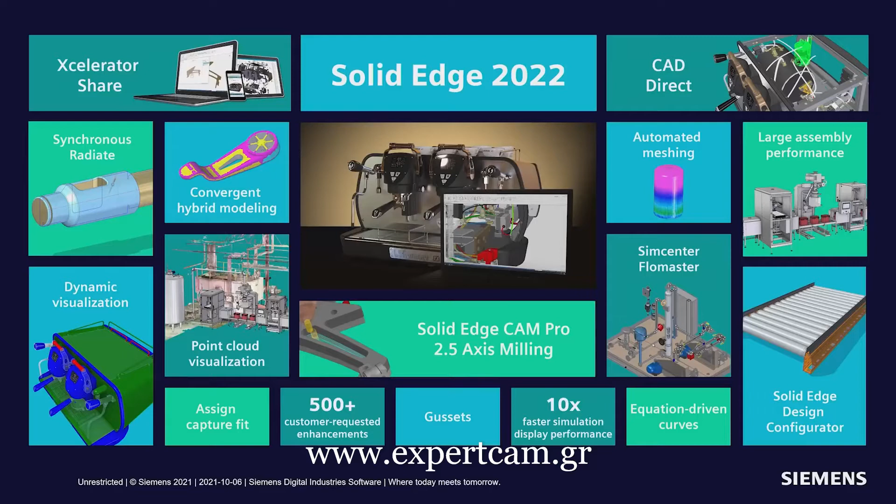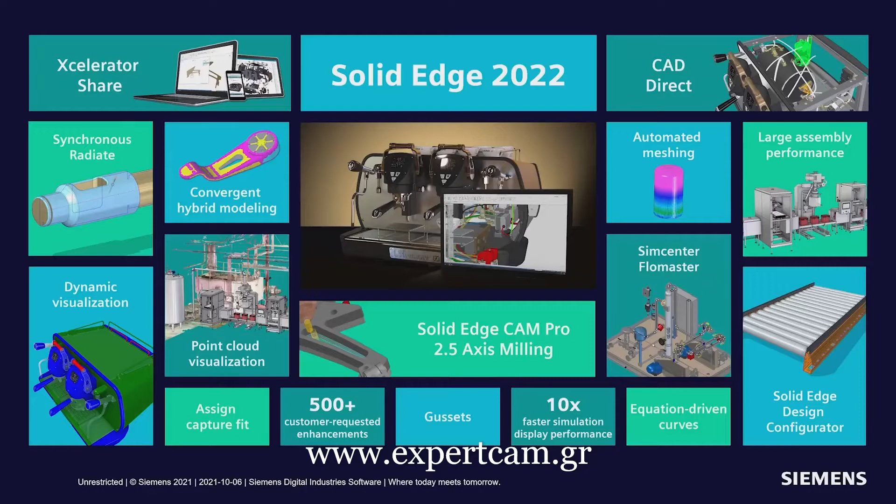So let's talk about Solid Edge 2022 itself. Solid Edge 2022. Engineered to grow your business. There's so much in it, we'll only be able to cover some of it today. Things like Xcelerator Share, allowing you to collaborate with customers and suppliers. Or CAD Direct, integrating CAD files from other systems directly into Solid Edge seamlessly. Point cloud visualization, big scans of plants, being able to design your equipment in context of that big scan. Solid Edge Design Configurator, a whole new capability to configure your designs quickly and easily for your customers.

Now, as we go through our discussion today, we're going to be using two different data sets because there's just so much to see, such a broad range of functionality with Solid Edge. We'll be working with an espresso maker from Fiamma, a company based in Portugal. And we'll also work with a product from Bergner, a company based in Switzerland that makes chemical and pharmaceutical custom machinery.

So let's start by talking about mechanical design. And let's start with CAD Direct. CAD Direct lets you seamlessly integrate data from other systems into Solid Edge without translation and automatically take updates. We'll also talk about convergent modeling. We've been working on this technology for several years now. It's getting very sophisticated. The ability to integrate mesh models with B-rep or solid models in one seamless way. So let's look at that with Jeff now.

Thanks, Dan. First, we'll take a look at subdivision modeling. In this example, we will add support members to the base of the Fiamma espresso machine. The new subdivision bridge command can be used to easily connect edges or faces of subdivision cages and create a lofted structure between them. Here you see an example of that, where we'll select the faces of each subdivision model that we want to loft between.

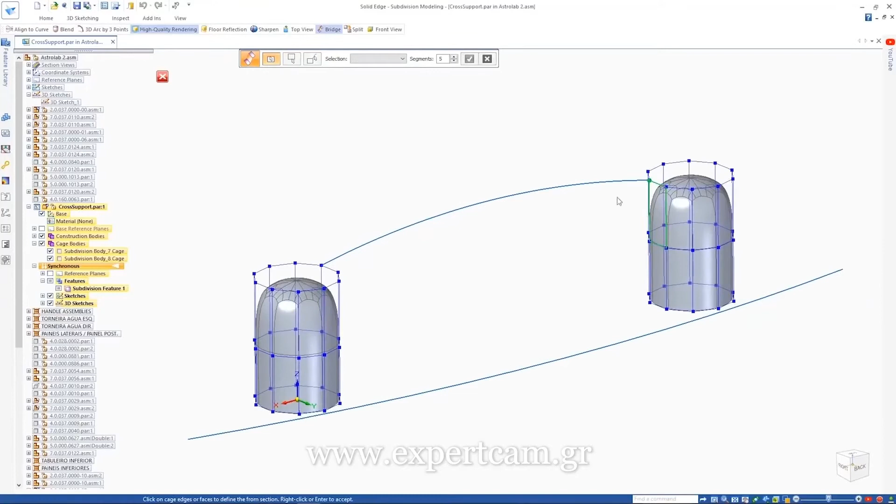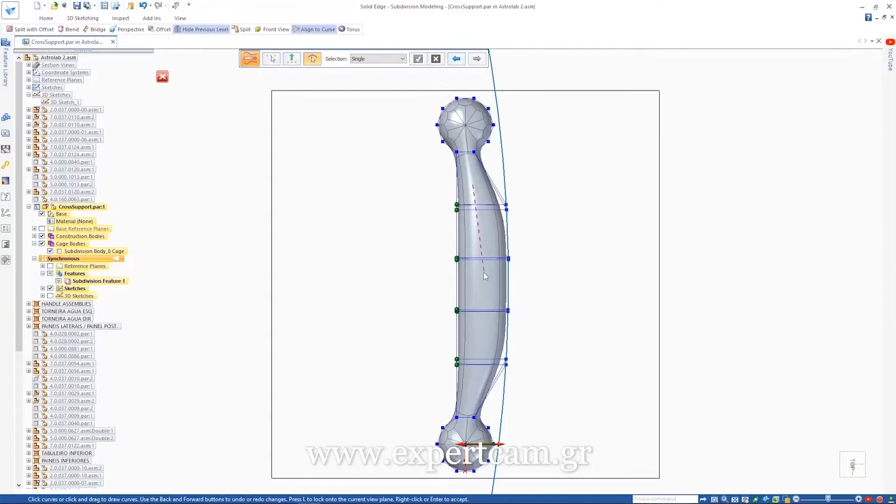Then we'll add the control curve to help us further define the overall shape. Next, we'll be using the new Align to Curve command to further define the shape of the part. Simply by selecting the cage vertices to define the direction and then picking the curve, those vertices automatically map to the curve. You can even sketch your own shapes and curves inside the context of the command. Even gesturing is supported for inking of your curves.

Here we'll show another option called Split with Offset to add some pockets to support the rubber feet of the support. A simple selection of the edges with an offset allows you to pull to create the pockets for those rubber feet. Next, we're going to replace the handle with a new design that's been 3D scanned.

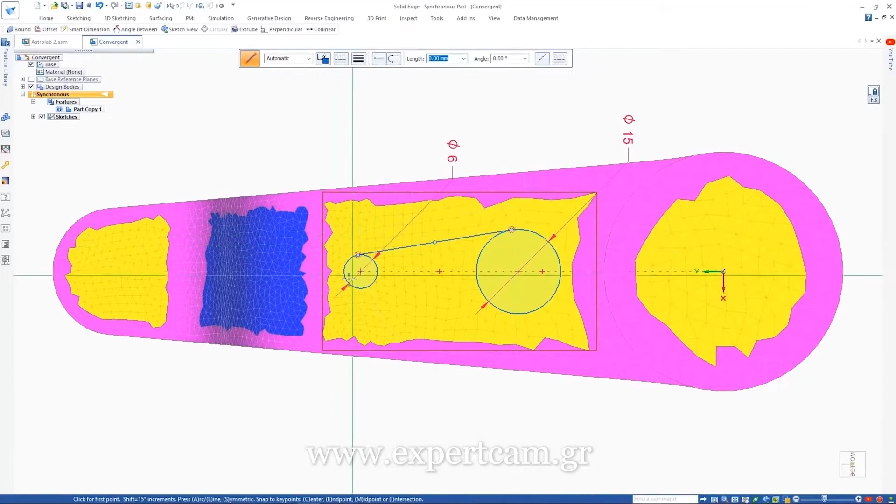This result is a mesh model that we import. We can visualize the mesh with the new Show Facet Edges command. In this case, we'll clean up this model a little with the Remesh command. Now, faces have automatically been identified and the sketches are added to the planar faces of the mesh. We add a series of cutouts in order to reduce the weight and improve the appearance of the part.

Notice the resulting geometry isn't faceted. Solid Edge now seamlessly combines mesh and B-rep geometry in the same body or part. We'll add additional cutouts to reduce the material. Once the cutout is complete, it can be patterned.

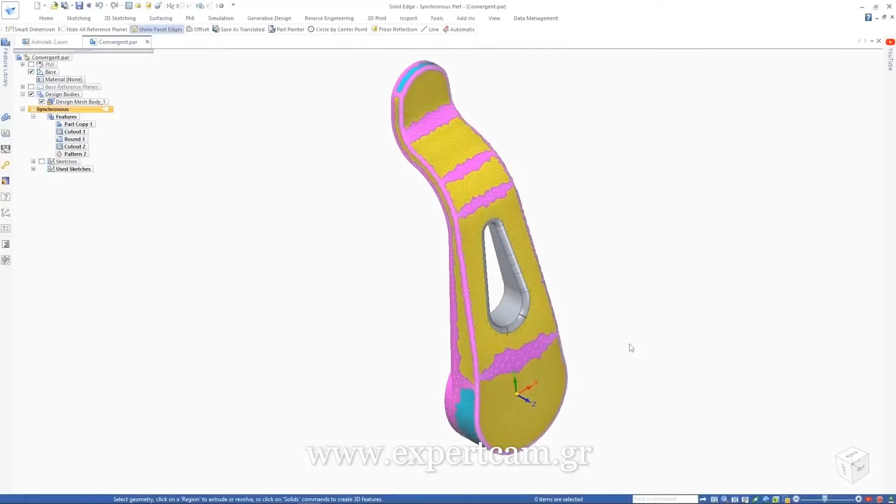Finally, we're back in the assembly where we'll replace the current handle with the new meshed handle. But you'll notice the mounting holes are missing from the component. This can easily be solved by doing a Boolean operation using the mesh model as the target and the components from the assembly as the cutting geometry. These new capabilities further enhance your ability to use mesh models in your design process.

Now we'll use the new component finder in the Solid Edge Pathfinder, and we'll search for the desired filter holder handle, which is designed as a family of assemblies. One of the versions is designed for a double espresso shot, the other is a single espresso shot. Opening the drawing of this assembly, we'll use the new family of assemblies parts list to place a table and detail the parts used for each member.

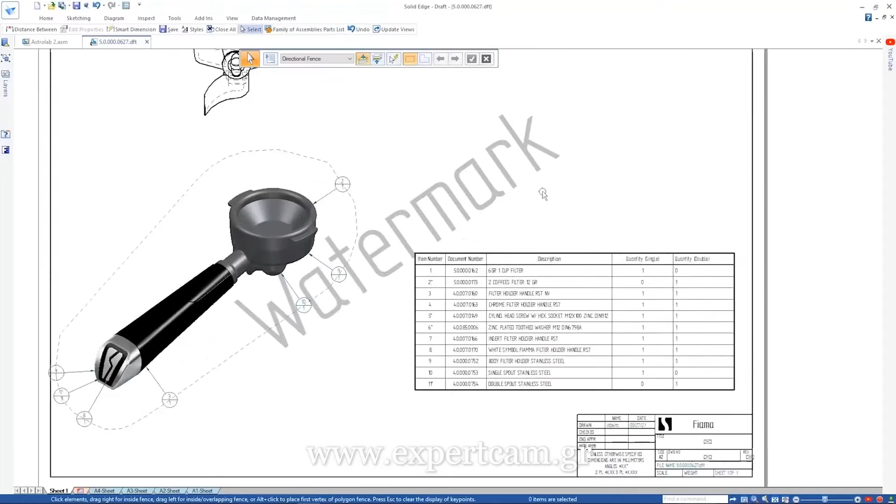Now we'll look at some enhancements to dimensioning in Draft. Dimensioning to virtual intersections or arcs of rounded edges is now supported. We can also choose to display projection lines to those intersection points. Watermarks are also used to convey important information on the drawing. We'll change the existing one so that it retrieves the document status for the drawing property text.

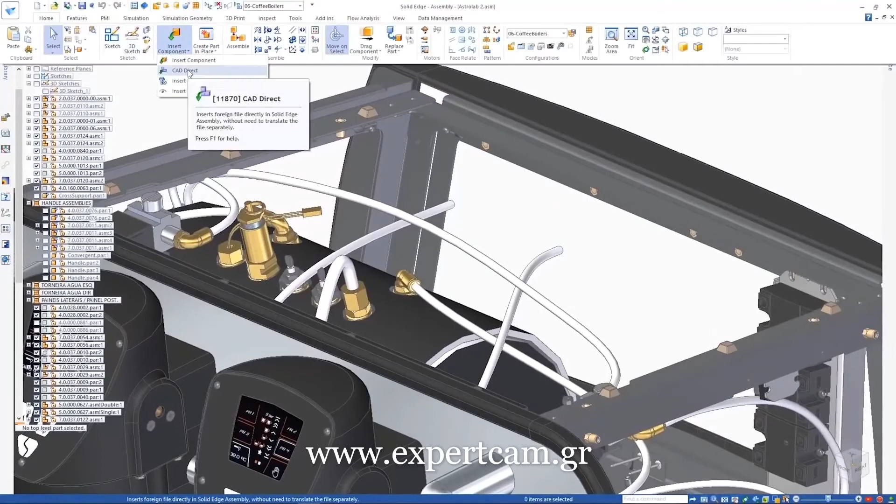The new CAD Direct command enables us to use foreign CAD data, geometry, and assemblies in Solid Edge directly without requiring any translation. The water boilers that you're looking at here were designed in NX. Once inserted into Solid Edge, they can be positioned just like any other assembly. Since we need two of these, we'll simply copy one to create the second.

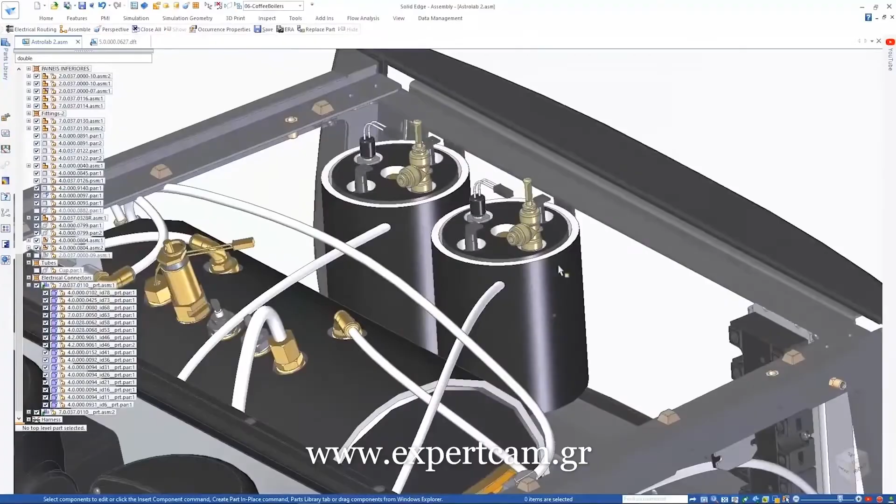Notice the boilers aren't quite in the right location. We'll go back into NX and make the changes needed to the mounting bracket such that they'll be in the right position. Since Solid Edge has associative links with NX, a simple update brings the changes in.

Next, we'll look at electrical routing enhancements. Solid Edge now supports the display of bicolored wires, allowing us to change the display of this ground wire to be striped green and yellow. Various pattern types are supported as well, including single stripes, helical stripes, zebra stripes, and dashes.

And finally, KeyShot, the best-in-class rendering solution, also sees some impressive updates. Decals defined in Solid Edge may be automatically transferred, saving time and effort, which can be seen here on the logos and the cups in the digital scene.

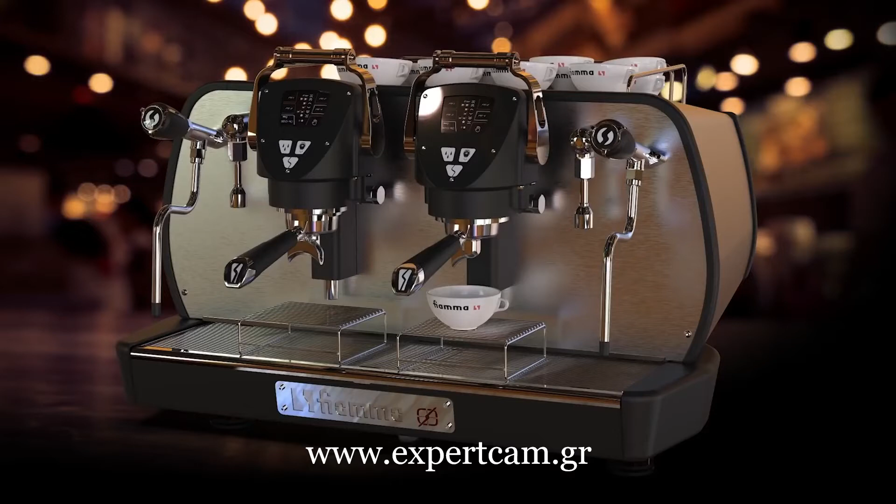Back to you, Dan. Thanks, Jeff.

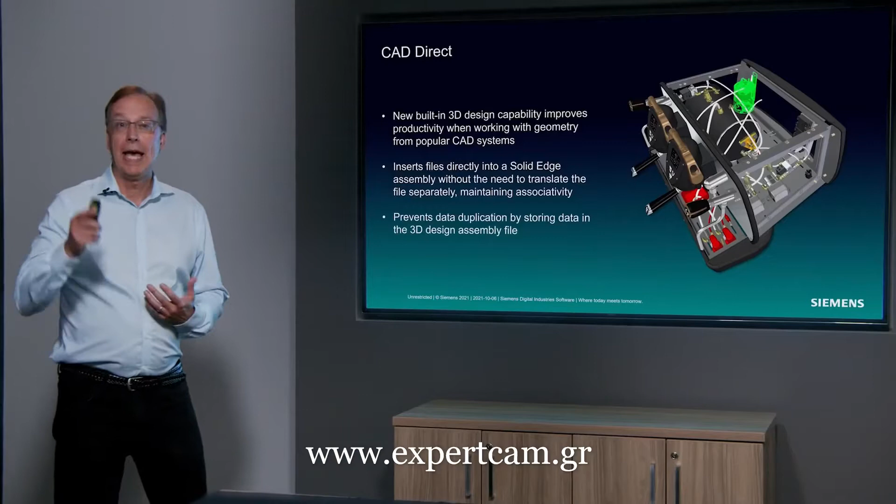Lots of amazing stuff in there, but I'm only going to highlight a couple things here that I think are real game changers. CAD Direct. So you have the capability you've seen to get an NX assembly into Solid Edge directly, no translation. And when you make edits to that NX assembly, it comes into Solid Edge automatically. There's no extra files to manage. You don't have to worry about that. It's all CAD Direct.

And what about convergent hybrid modeling? You saw taking triangle meshes and B-rep solid models, pulling that all together into a single cohesive model, significantly reducing your design time.

Let's talk about some other mechanical design enhancements, some other great things in here. Point clouds. It's becoming fairly common to be able to scan an entire plant or factory and bring that data forward. We can now bring that data into Solid Edge so that you can design in the context of that factory or plant.

What about large assembly modeling? We see people first building parts, then assemblies, then whole factory lines. Assembly modeling in Solid Edge keeps getting faster and faster and faster, best in the business. And Synchronous Radiate, an amazing new command within the synchronous modeling environment that allows you to deal with radially symmetric parts and edit those effortlessly. So let's take a look at that now, Jeff.

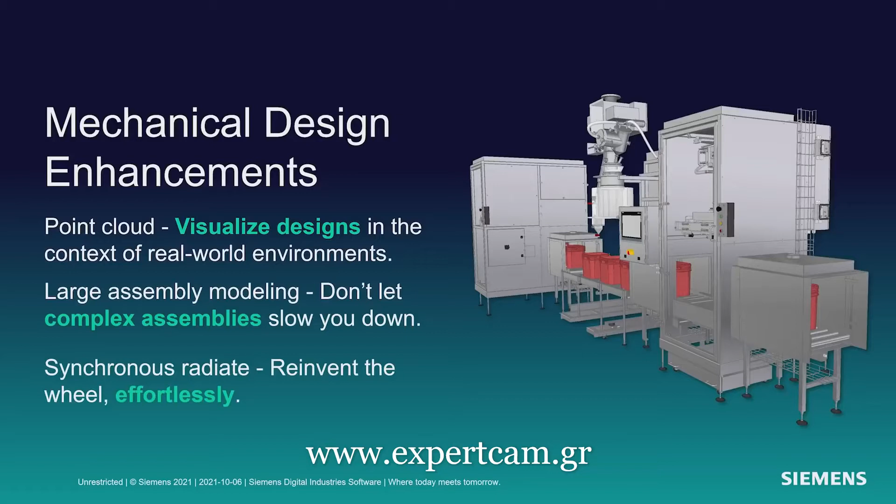Thanks, Dan. Well, the first thing we'll do is we'll take a look at a new assembly preview mode. This mode allows you to very quickly open Solid Edge components and very large Solid Edge assemblies lightning fast. In preview mode, you can manipulate the view, show and hide components, and apply display configurations. In this case, we'll isolate the most critical part of the model that we want to edit using a configuration. Then we'll simply tell the system how we want to open, and open only the components that are to be edited, saving you time and memory.

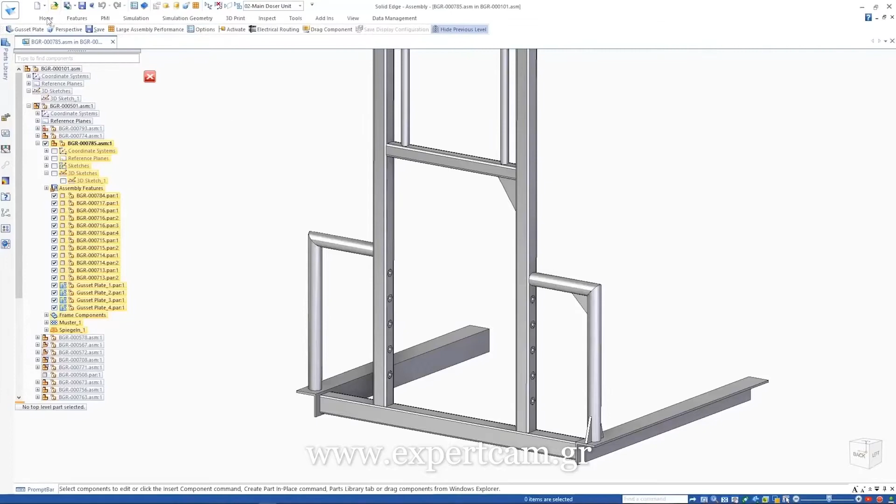Another time-saving enhancement is the gusset command. We now allow you to automatically add gussets to a frame structure. Here you can see the user interface. You can define these gussets in any shape and size that you desire. Then you simply select the frame element, position where the gusset is to go, and the system automatically creates the component there.

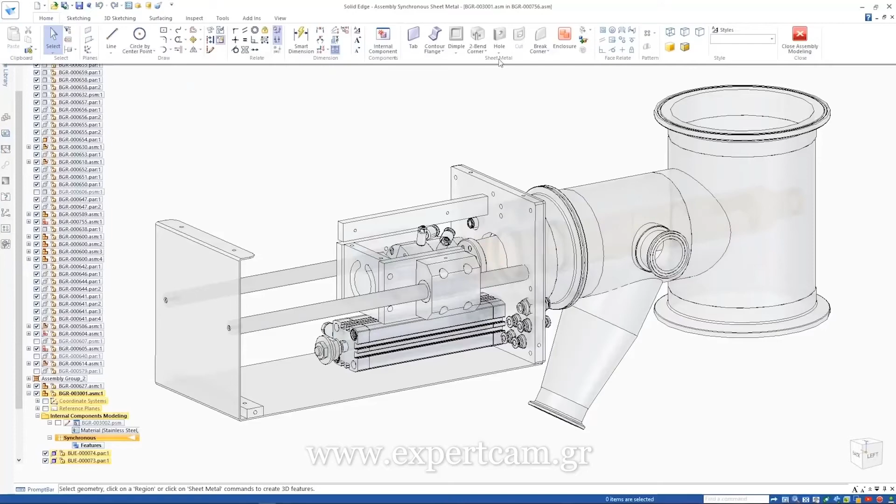If we continue down the internal components theme that we introduced in the last release, we now allow you to create an internal component and actually create the model geometry directly inside the Solid Edge assembly. We've introduced this new assembly modeling capability that gives you the ability to create the entirety of a design without any need for an external file. Here we have a pneumatic cylinder, which will be imported as an internal component. We need to add a bracket to this assembly, but since it's a purchased part, we'll just create this as an internal component. And again, saving the need for external tracking of files.

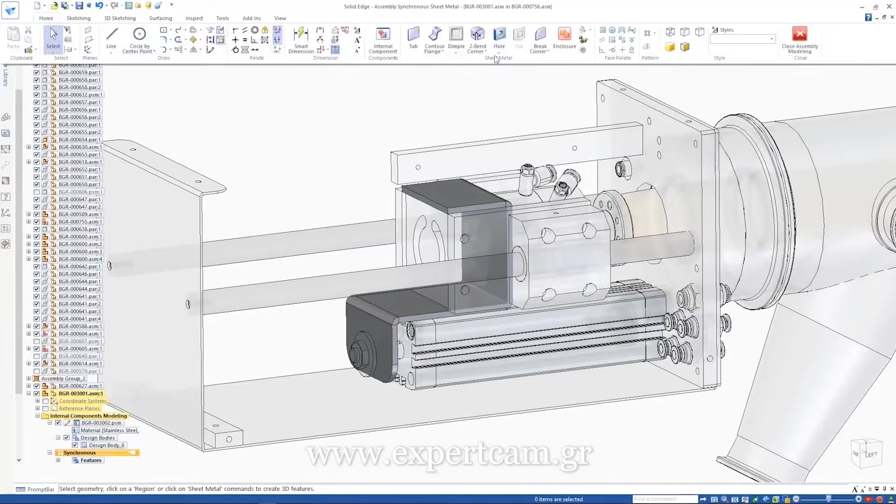If you'll notice during sketching, a pop-up menu allows you to quickly access commands that are relevant to your selection. And this is new for Solid Edge 2022. So we've defined our sheet metal part. We'll also have to give it a material definition and a gauge definition. In addition, we're able to create geometry and reference the components from the assembly, whether they're internal components or they're real components in the assembly. So again, we're defining the material gauge for the sheet metal component, and we've defined this component completely inside the context of this assembly. You're also able to drag the component, doing animations using both internal components as well as the real component combined.

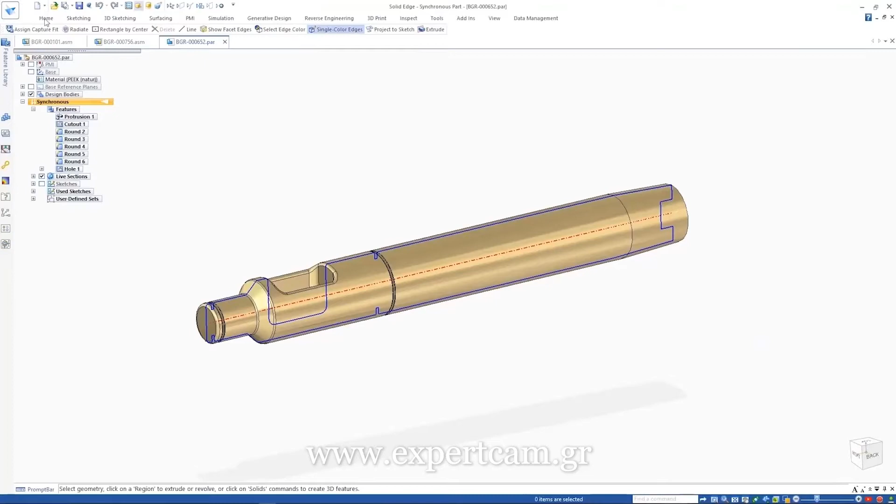The new component finder speeds up the process for locating parts within the assembly. You simply key in the name and it finds the list quickly. Here we found a shaft, and we used the new radiate command to edit the radius or the diameter of the shaft component. You simply select the shaft, putting the components in the select set that you wish to change, and then Synchronous does the rest. In this particular example, we want to include the pocket in the radiate and the offset option. Simply selecting that pocket and including it allows that to be done.

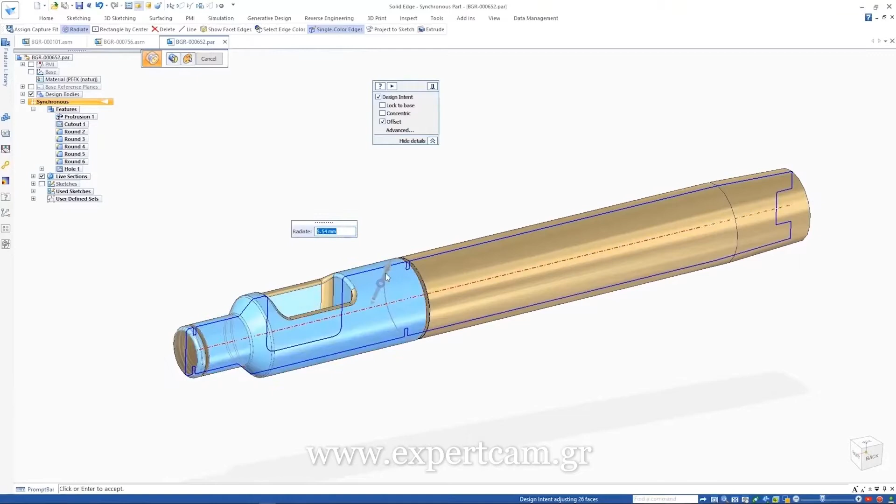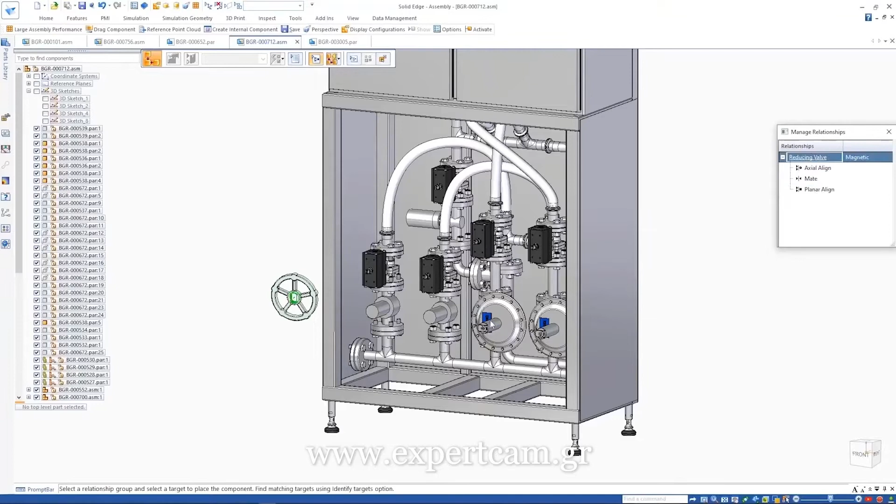A new Assign Capture Fit command allows relationships to be predefined on a component while in the context of the part. Here you can see that Capture Fit relationships already exist. We'll add a new Capture Fit to the collection and save it to the component. When I place the handle into the assembly, all you have to do is select the component and select the mating components that you want to mate it to, and the handle automatically snaps into place. It's as easy as that. Here's another example where we have a handle that needs to snap to 5 new locations. Again, the Assign Capture Fit makes it easy.

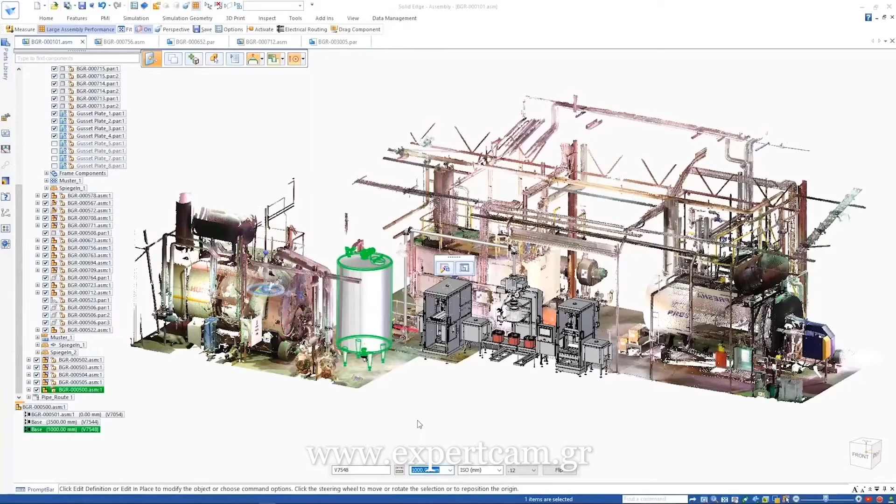Solid Edge now has the ability to place point clouds within the context of your design. This allows you to reference and visually indicate where your components will be placed inside a large assembly. Solid Edge supports multiple point types and then allows you to position your component inside the context of the plant design. The point cloud can be easily repositioned. Clipping planes can be used. You can even measure to the location of the point clouds relative to your design. Here you see that the tank component was in the wrong position and it was moved to match the point cloud and the plant definition more precisely.

And that's it, Dan. Back over to you.

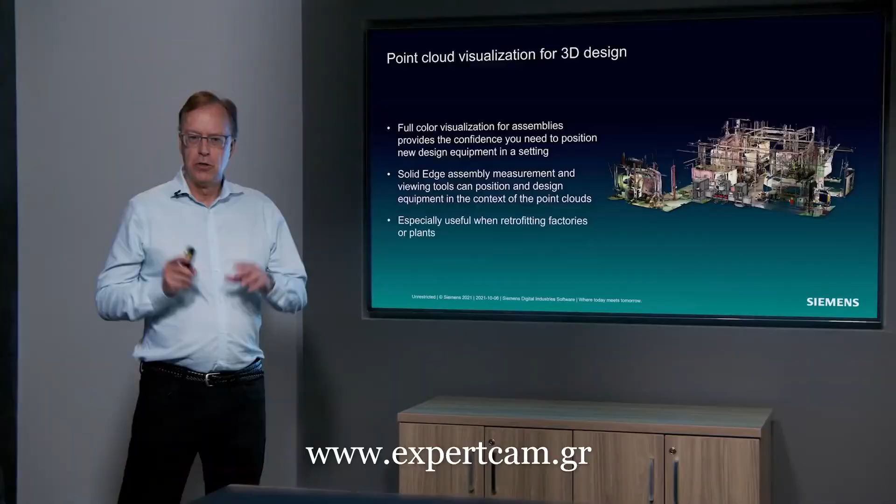All right, thanks, Jeff. So many great things to see in there. But again, something I really want to highlight to you is a game changer: point cloud visualization. The ability to take scans in, gigantic scans, millions or billions of points, and be able to look at those in the context of Solid Edge and be able to integrate your design directly in there and design in context of that point cloud. As you can see, they're full color, they give the full feel of the plant or factory. Really amazing stuff.

And we see that our customers really love this new technology. So Benjamin at Bergner, for example, eliminated a lot of tedious manual effort. It's just so much easier with the new point cloud technology.

And what about large assembly modeling itself? Order of magnitude increase in large assembly modeling performance. So you have that preview mode where you can very quickly bring up the assembly, very, very massive assemblies, decide what you want to work on, and then just bring in that bit of the assembly. Really improve your productivity.

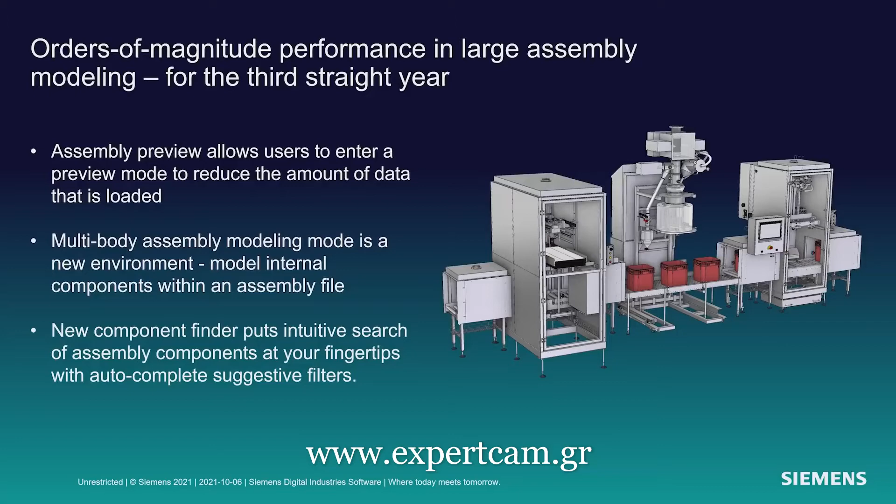And we see that folks are already taking advantage of this. Our beta customers have been using this, like Luca Carminati at CMS. Much, much faster work, save a lot of work on their designs. And what about synchronous radiate? Really amazing stuff if you're working on those axisymmetric parts. Being able to make edits without having to do any extra effort happens almost magically. Great stuff.

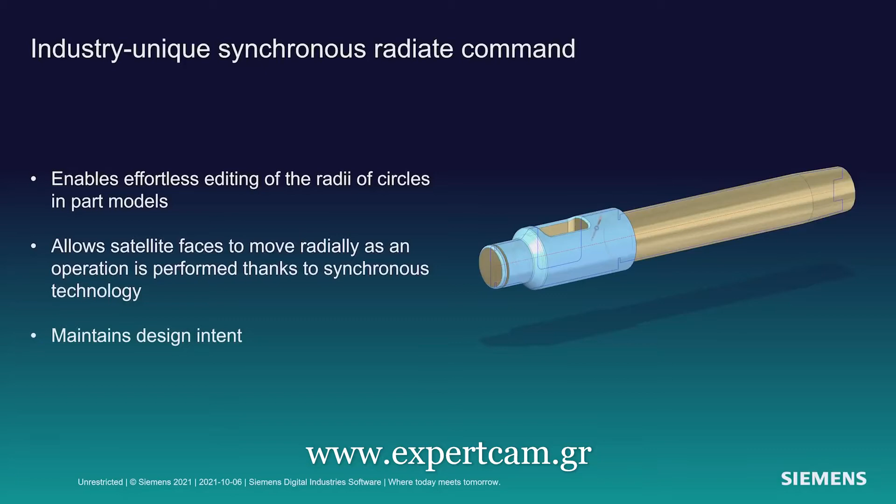Okay, next up is Solid Edge Design Configurator. I'm very excited about this. If you're doing any engineer to order, configure to order type of products, the ability to very quickly change your designs and have new quotes very quickly. Let's take a look at it with Jeff.

Thanks, Dan. The new Solid Edge Design Configurator allows you to design multiple product variants directly in the context of Solid Edge. In this example, we'll configure a variety of conveyor designs. The first step is to select the component to be configured. The next step is to define the master input parameters of the configuration. In this case, it's the length and width of the conveyor plus the pitch of the rollers. Values can be easily edited for any parameter, and the images can be included in order to help the end user identify the needed inputs when configuring the model.

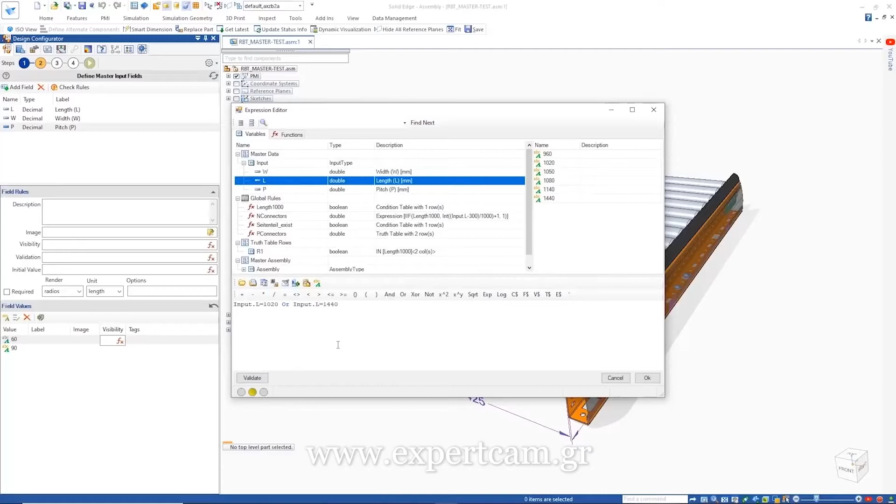Defining a new input parameter for the pitch of the conveyor, we will quickly configure the name, type, label, and render style to use radio buttons. The pitch value of the conveyor can be customized between 60 and 90. However, since different lengths of the conveyor require different pitches, visibility rules need to be applied. This is done by making use of a simple expression to define the intelligence. Here, the rules are being validated to ensure the consistency and proper definition have been made.

Here, the function is going to be copied and pasted to allow you to easily reuse formulas without having to include them again. Skipping to the last step of the configuration, we can see the configuration form is properly created. Next, defining the rules for the process. Here we have multiple rules to drive and configure the connectors at the bottom of the conveyor. We will use a combination of simple condition and expression rules and a truth table to work out the number and positions of the connectors. All rules can be quickly validated.

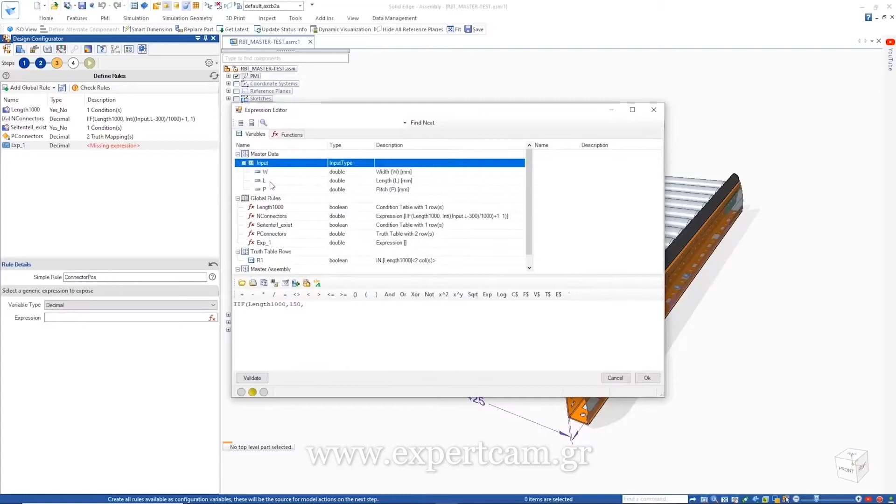Finally, we specify the actions to be taken. Here, variables are set and components are replaced to satisfy the input parameters. A rename model action will ensure our final assembly will be renamed appropriately and also create the other necessary outputs, for example, a STEP file as shown here. Now we can run it quickly and create as many configurations as needed. A newly generated configuration can easily be shared with Pack and Go. The configuration logic is all stored within the CAD model. There's no need for any further plugins or external resources.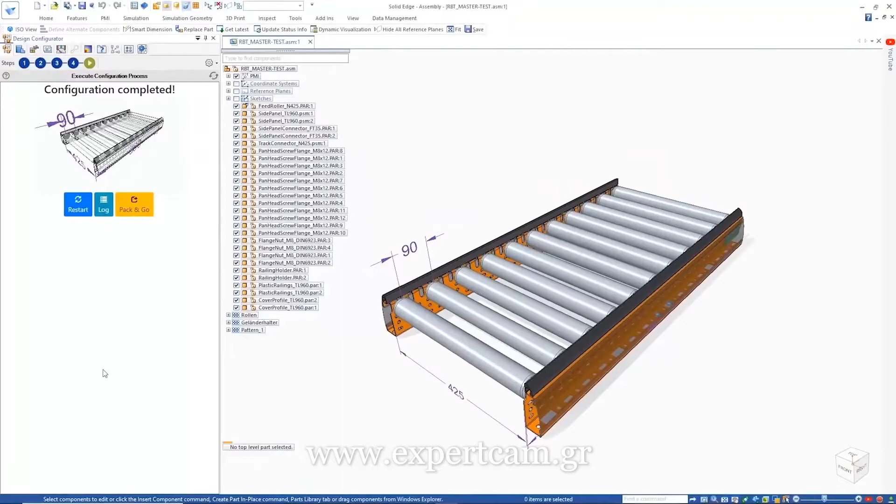And with that, Dan, I'll hand it back to you. All right, thanks, Jeff. So as you see, with the Solid Edge Design Configurator, you can accelerate your configure to order and engineer to order processes and create compelling sales proposals. You're also going to see that it really error checks for you and it creates a nice dialogue for your users to interact with so you can very quickly configure new products.

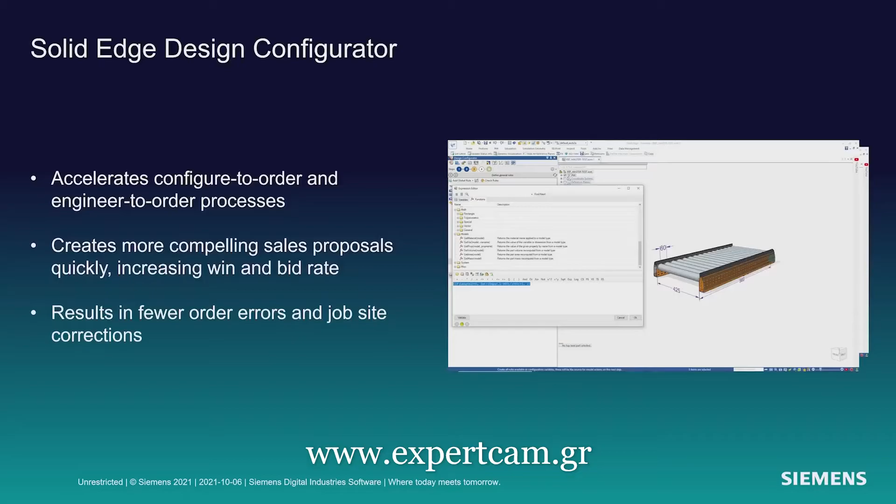What about CAM? Solid Edge CAM Pro. Tried and true technology developed over the last 40 years. A lot of users using it today and enjoy the benefits of it. But what if that technology was available to all of you, all Solid Edge customers on maintenance? That's what we want to introduce to you today with Solid Edge 2022. Jeff. Thanks, Dan.

Here we'll be using Solid Edge CAM Pro to create the manufacturing toolpaths for the rear legs of the Fiamma espresso machine. First, we'll use the Solid Edge assembly tools to create the shape to represent the stock parts, and also the parts that form the fixture assembly, which includes the standoff plate as well as the additional fixing holes from the standard database. We will also make use of supplier catalog in 3D Find It to get the appropriate socket head cap screws to be used to fix the component in the fixture. So as you can see, Solid Edge is a great CAD for CAM tool.

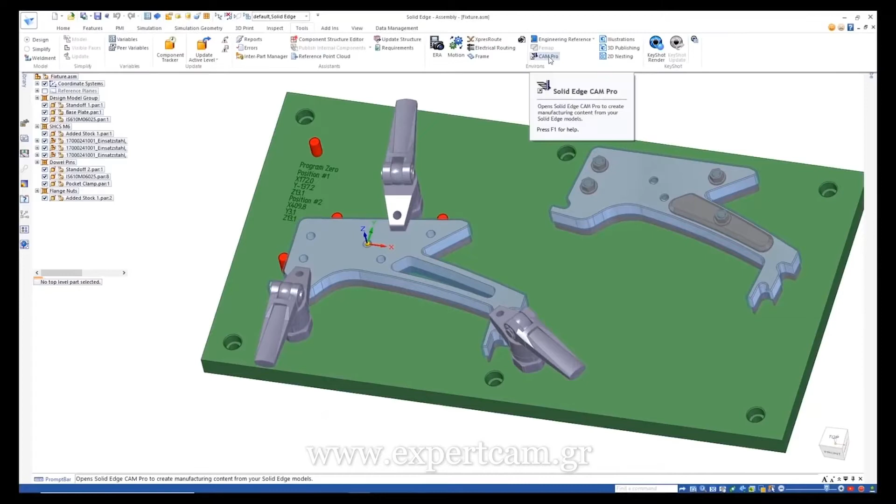We'll need to machine this in two separate steps. Step 1 is to mill the pocket and drill the holes, and step 2 is to machine the profile. One click will send the entire assembly to the Solid Edge CAM Pro application. Note that associativity is maintained at the complete assembly, so if there are any last-minute changes, we can quickly update them and continue the NC programming process.

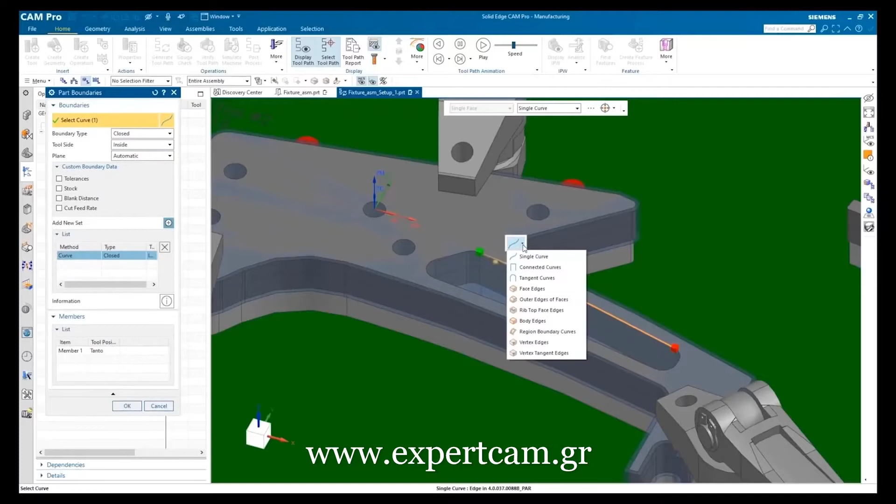New for Solid Edge CAM Pro is the ability to create adaptive roughing toolpaths for 2.5-axis operations. This is included at no additional cost. These are faster than traditional toolpaths and extend the cutting life of your tools. Notice the advanced graphic capabilities for validating your toolpath.

Here we'll create spot drilling operations for the 5 holes in the support. Notice the graphical pop-up hints that help us with operation selection. Graphical helps are also available for geometric selection. Each time we select a hole, we get a preview of the machining that will take place. Again, at any point in the process, we can get visual feedback on our decisions.

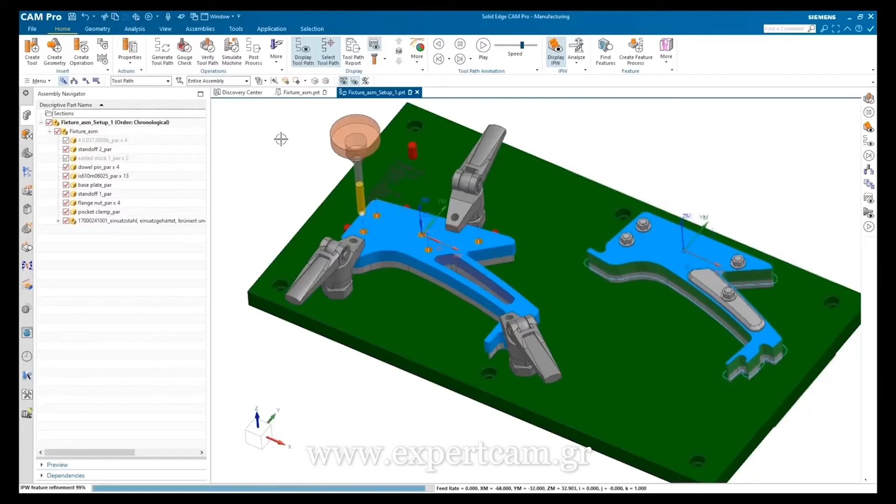Now that our CNC program is complete, let's run through the whole visualization process. Notice you get to completely visualize the entire machining process before committing it to machining. Of course, no job is finished until it has been post-processed for a specific machine.

That's where PostHub comes in. It's an online database of over 1,200 post-processors. You can easily filter and find exactly the one you need. Also, PostHub is constantly updated, bringing you the most recent tools. And Dan, with that, I'll turn it back over to you.

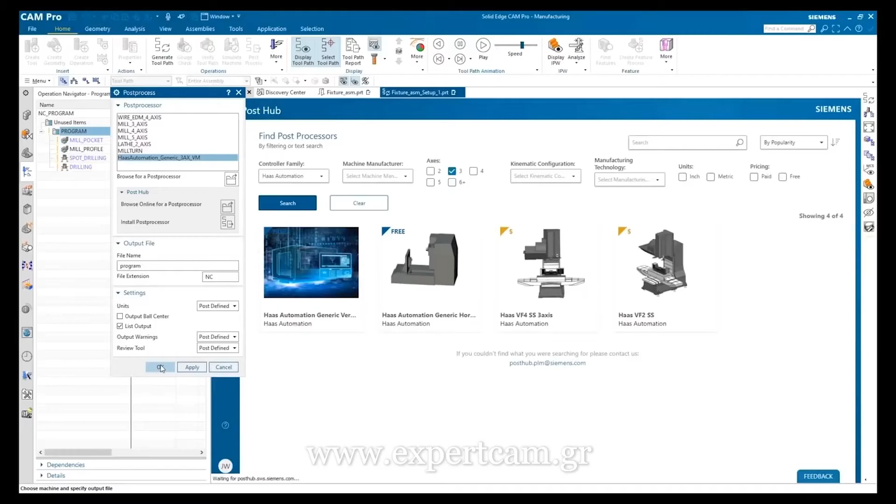All right, thanks, Jeff. I'm really excited about this. There's a great heritage in Solid Edge CAM Pro and our machining technology over the last 40 years. Many people enjoy that technology, but now every Solid Edge user who's on maintenance can enjoy that technology and work with Solid Edge CAM Pro.

Next up is Solid Edge Share. I'm super excited about this. It's a functionality in Solid Edge that allows you to collaborate with colleagues, suppliers, customers very easily. Nothing for you to set up, works on all sorts of devices. So let's take a look at that.

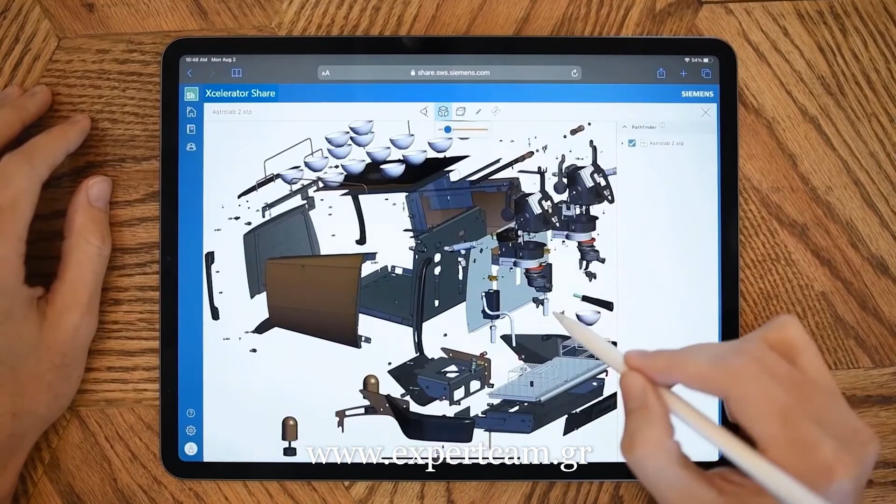Jeff. Thanks, Dan. Solid Edge Share allows you to import your CAD models into a secure cloud location. Within that context, you can view, you can rotate, you can show/hide, you can 3D section, you can even do measurements and markups. Here, a reviewer has identified the need for some change in the design. The location of the change is identified by a sticky note and a place describing the needed change.

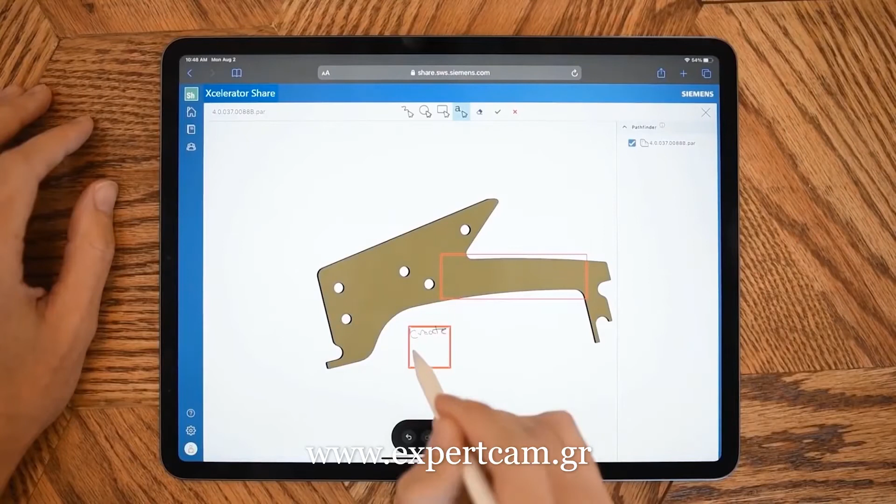Solid Edge Share offers maximum traceability, as all markups are recorded, enabling conversations back and forth on any of the issues you're tracking. It also records who made the markups and when it was made. We can also easily go back to the markups at any time. Simply save your markups and send them to the designer for review.

With Share, you can also directly connect to Solid Edge, synchronizing your data from your desktop to the cloud. Here we have the same project on our desktop. It's represented simply as a folder. Any data that we have in this folder will get synchronized in the background.

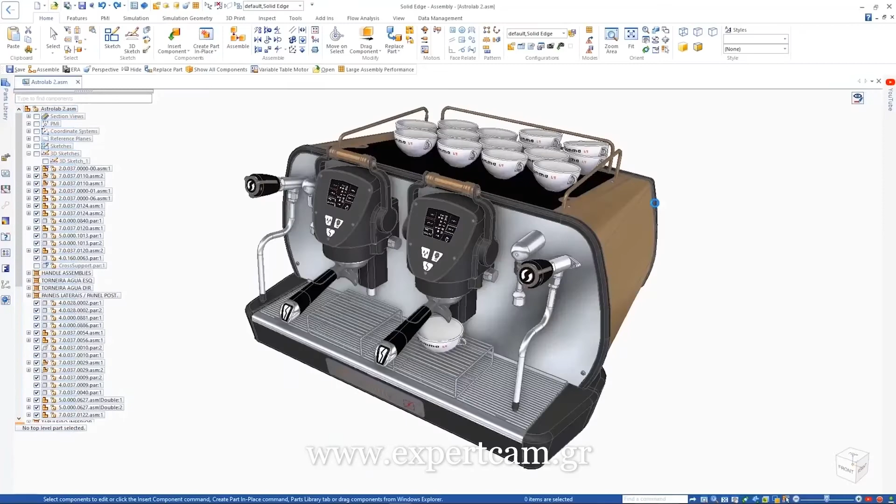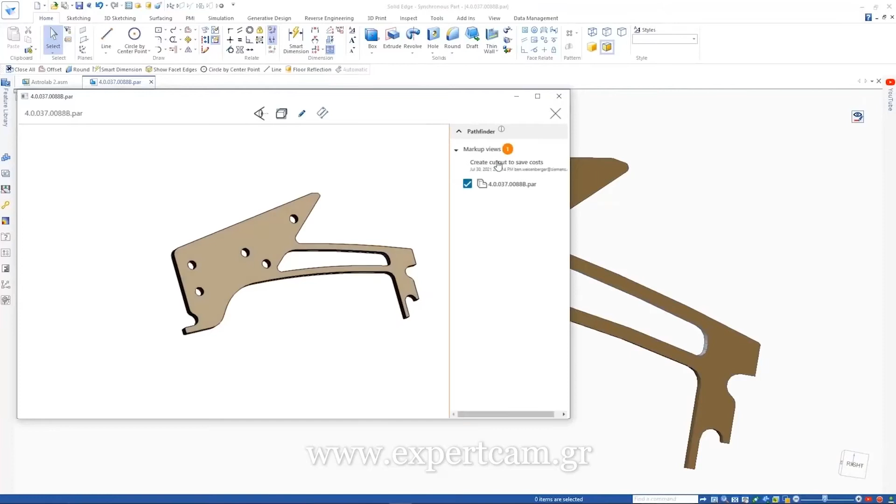In Solid Edge, we can securely sign into Solid Edge Share and see those same cloud-based projects. The espresso machine can be opened and we can go right to work on the part in question. The designer can easily access that same markup in the cloud directly from within Solid Edge. Once completing the change, another markup continues that two-way conversation and collaboration with other stakeholders so that the issues are tracked appropriately.

Another great feature of Solid Edge Share is the ability to share a project with anyone. Simply enter the email address of the person with whom you'd like to share and choose their access permission level. Here we can choose view, or view and download, or edit and download, depending on how you want to protect your intellectual property. We'll share this design with one of your colleagues and our customers and give them the appropriate access.

Finally, with the Share Augmented Reality feature, you can see exactly how your designs will look in the real-world environment. Snap the design onto any surface seen in the camera lens at the correct scale. The finger gestures can be used to manipulate the model and easily visualize what your design looks like in a real environment. So back over to you, Dan.

Thanks, Jeff. All right, Solid Edge Share. Really great stuff. Next generation cloud-based collaboration that allows you to work inside your company with colleagues or work with suppliers, work with customers. Nothing for you to set up. Works on every device. So whether you have a Mac or an iPad or a Chromebook, it works on all those devices with no special setup. And you saw the ability to write notes that are automatically converted to text, share those markups. Very exciting stuff.

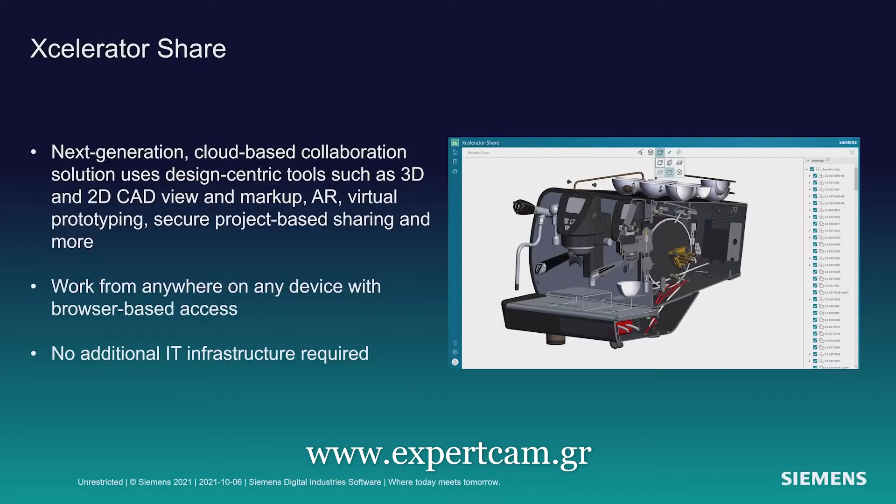Next up is dynamic visualization. You make complicated products, large assemblies. How do you know which parts are from which supplier, or which parts are of what material? Dynamic visualization will help you with that problem. Let's take a look at that now with Jeff.

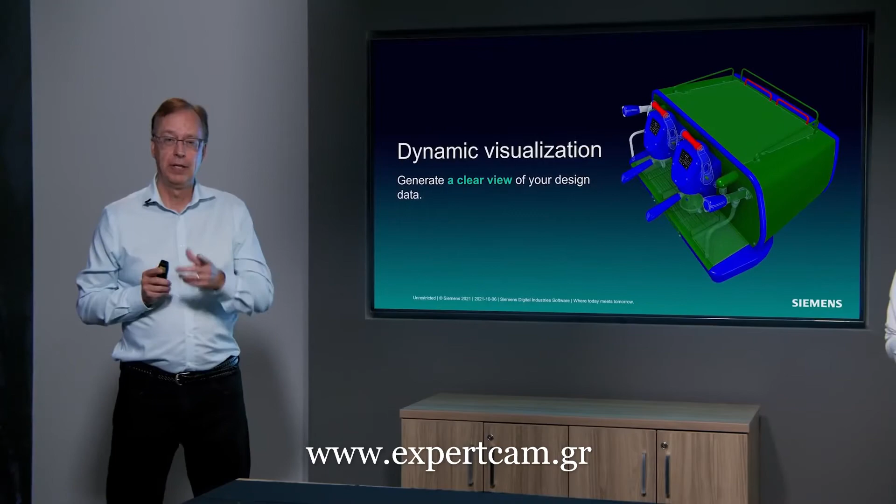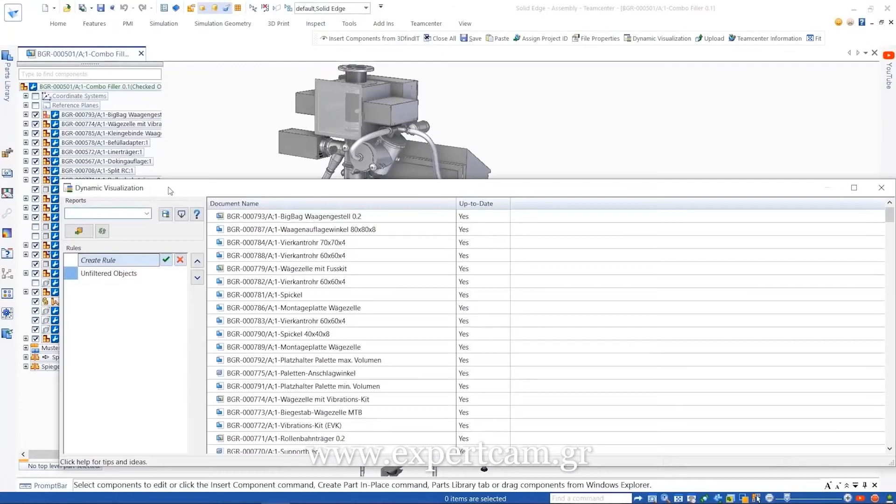Thanks, Dan. Dynamic visualization gives you great capabilities to generate visual reports of your assembly. We'll open a Solid Edge assembly using Teamcenter Active Workspace and create a visual report based on component supplier and material definition. First you add columns to the user interface for the properties you want to filter on. Here we've added suppliers and material, and for each we'll filter on the particular material and supplier we're interested in visualizing.

Once the rule is created, you simply apply it, and the model display changes to show you the rule definition. Here you can see in red the components based on that supplier and material selected. You can also export these rules and import them into various assemblies.

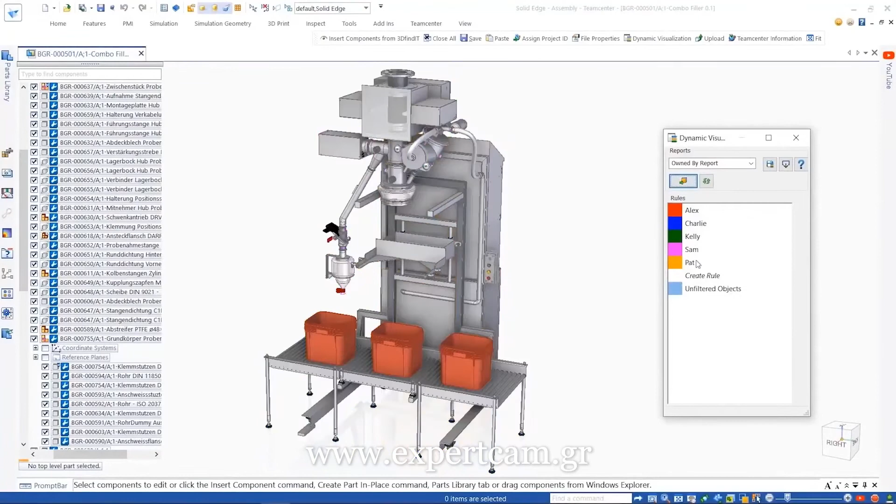Here we have a rule that identifies which user created which components. We'll modify that rule to identify work in progress as well as components created by Pat. We can highlight those, select them, and then go into edit mode, where we'll see we need to add a warning light to this box.

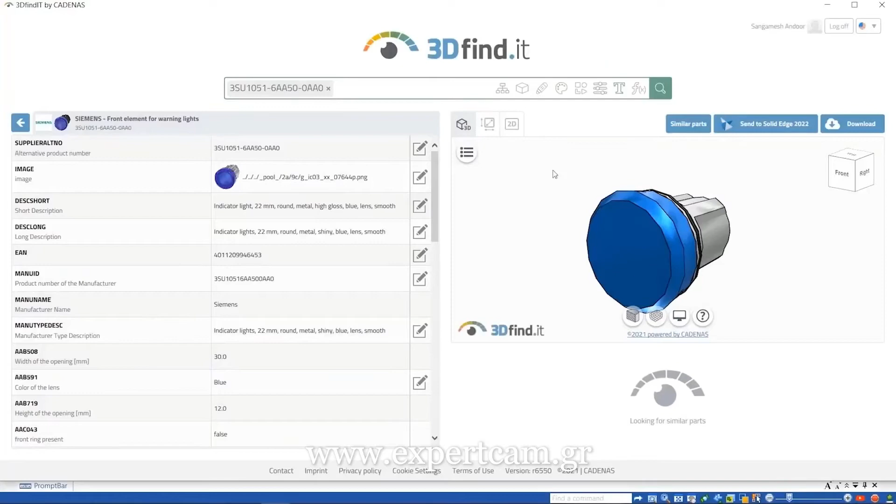We use 3D Find It to find the particular light from the particular supplier that we want. Once we've identified the right one, we'll generate the component in Solid Edge. But in this case the component already exists in the Teamcenter database, so instead of replicating it, we'll simply reuse what's already there.

Also in Solid Edge 2022, we were able to take advantage of the project definitions within Teamcenter. Here we can see we've assigned the components to a particular project in Teamcenter.

The Solid Edge built-in data management also supports dynamic visualization. Here again we'll display the assembly coloring based on material type to ensure we have the proper materials throughout the model.

So the rule is applied and visually displayed, and you'll notice the red handles should be green — those should be stainless steel and not aluminum. So we'll send those back to the designer to be reworked with the proper material applied.

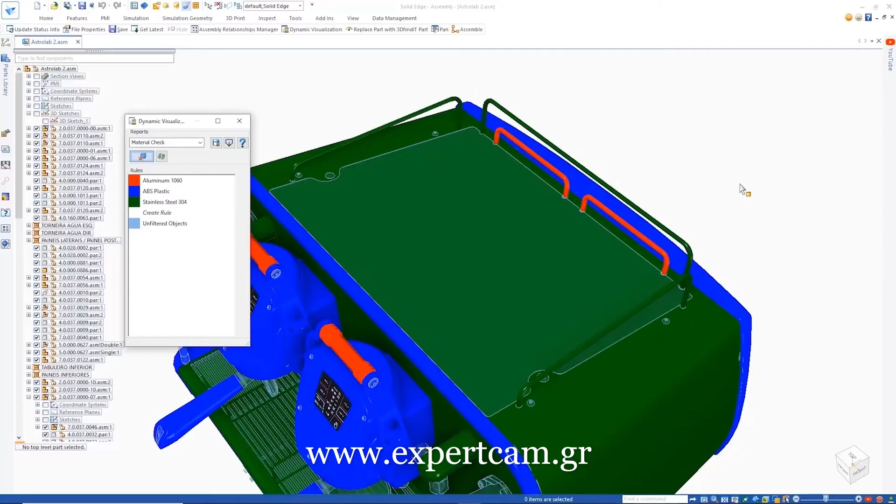Once applied, we can do an auto update of the status, and the system will automatically show us the status and update to get the latest component. In this case, the handles are updated with the proper material. We'll rerun the same rule, and you'll see the handles are now green and therefore in the correct material.

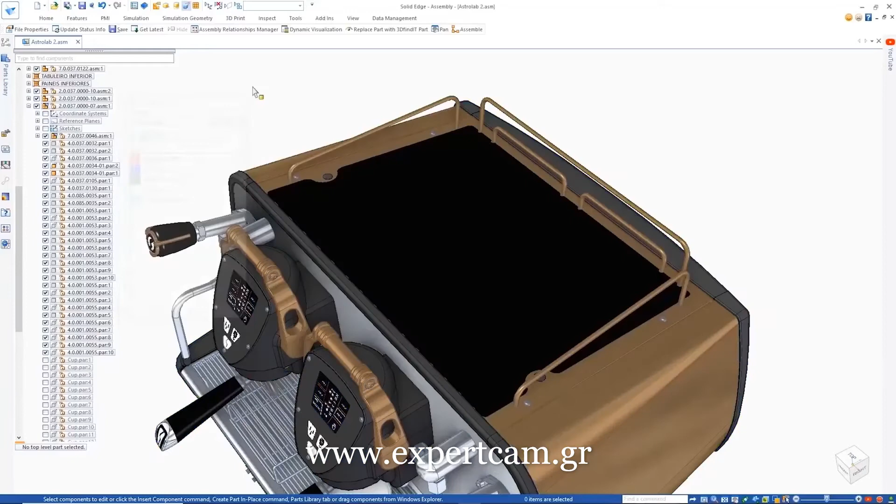Another nice enhancement is that we've modernized the file properties dialog. You can see it looks much more user-friendly and lets you easily create new custom properties, as shown here.

This next example will use replace part with 3D Find It. 3D Find It has the ability to take a component and use its geometry to search the catalog database for similar components. Once the component is found, we identify the supplier we desire, and with a few simple clicks that component is inserted into the assembly, replacing the previous geometry.

And lastly, we've added Pack and Go directly to the Windows Explorer UI, making it easy for you to share your data without having to open the assembly within Solid Edge. That's it, Dan, back to you.

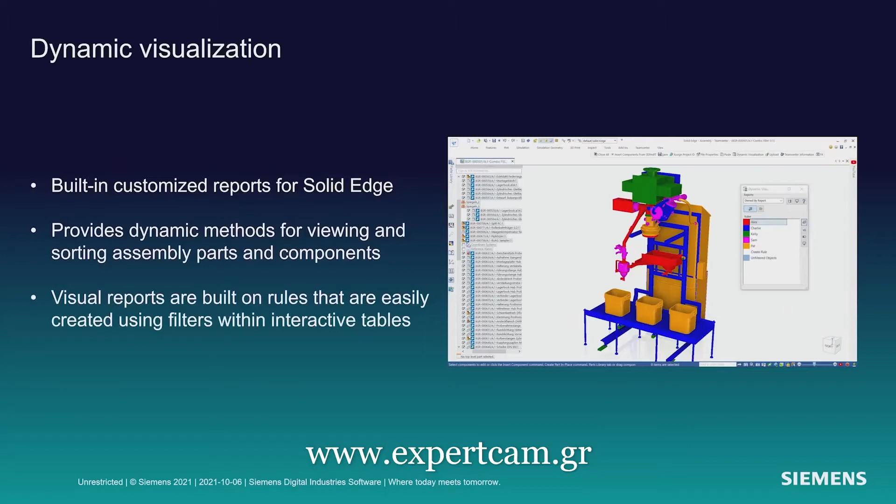All right, thanks so much, Jeff. So many good things you saw there with 3D Find It and the ability to replace components, searching directly using geometric shapes and so on. But I want to highlight this dynamic visualization — being able to say, what supplier do I have for the different components? Color code for me all the things that are stainless steel. Color code for me all the parts that are in work. Amazing technology that would save you a lot of time and money.

Next up is Solid Edge Simulation. We have some great enhancements, some game-changing ones in terms of the ability to remesh parts using the body mesh command, and some other great tools. Let's take a look at those, Jeff.

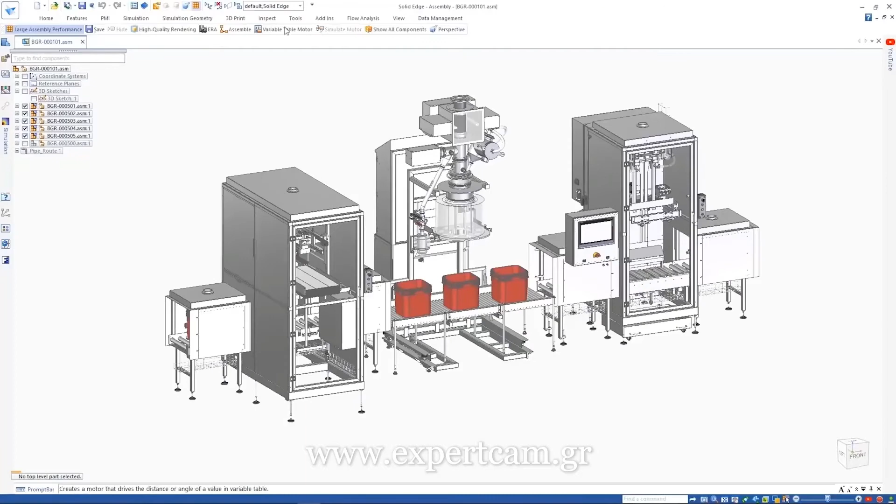Thanks, Dan. We'll start by looking at a new boundary condition allowing the user to apply hydrostatic pressure to a model. We'll apply a configuration that gives us the geometry of interest. Here we want to look at this tank on the left and do an analysis assuming that tank is filled with liquid.

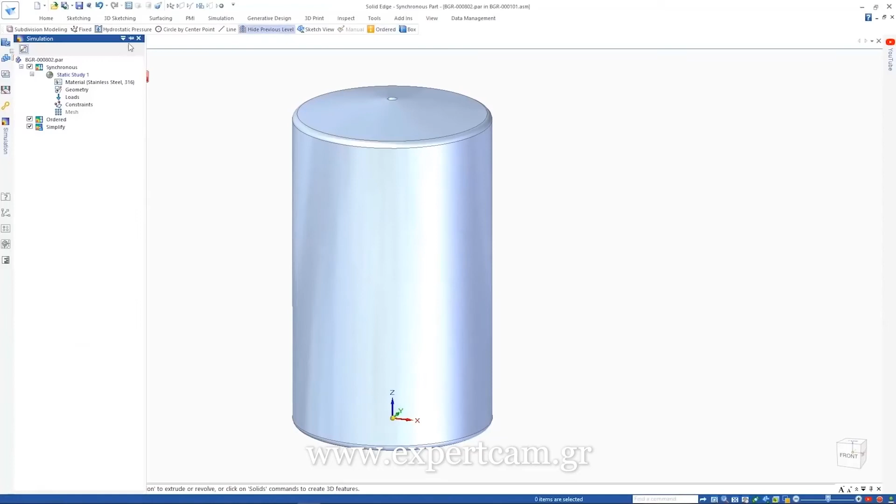So we'll create a static study, and in the definition of the loads, we'll use the new hydrostatic pressure command. All you have to do is identify the surface to apply the load, identify the depth of the liquid in the tank, and then provide the density of the liquid within the tank. Solid Edge will do the rest.

To finish the analysis model, we'll apply constraints to the bottom of the tank and then perform the meshing and analysis as needed. Notice on the new mesh dialog a body mesh. This is proprietary technology from Siemens that does a really good job meshing complex models. Some things that couldn't be meshed before can now easily be meshed much quicker and much more reliably than in the past.

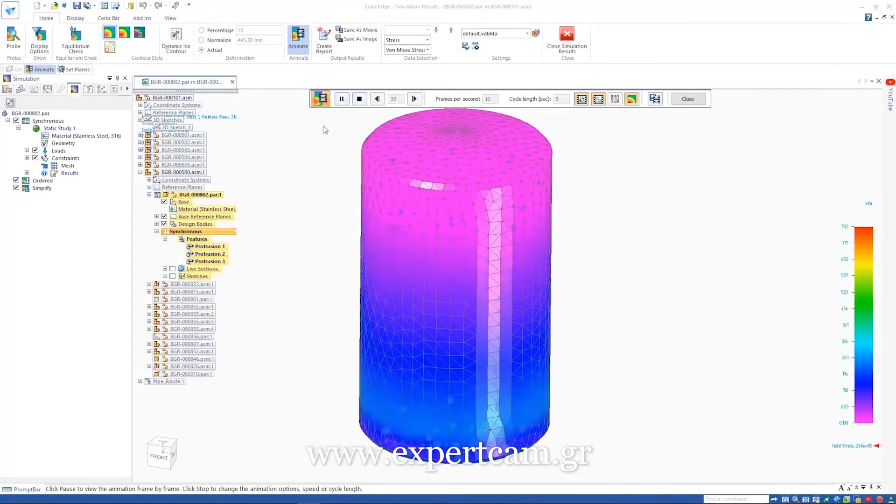So here you see the result of the hydrostatic pressure load in this tank. We'll change the liquid level in the tank and run the analysis again just to validate that this tank will withstand the pressure exerted on it in production.

There you see the animation of the stresses, and they show up in the obvious place at the bottom of the tank where you might expect.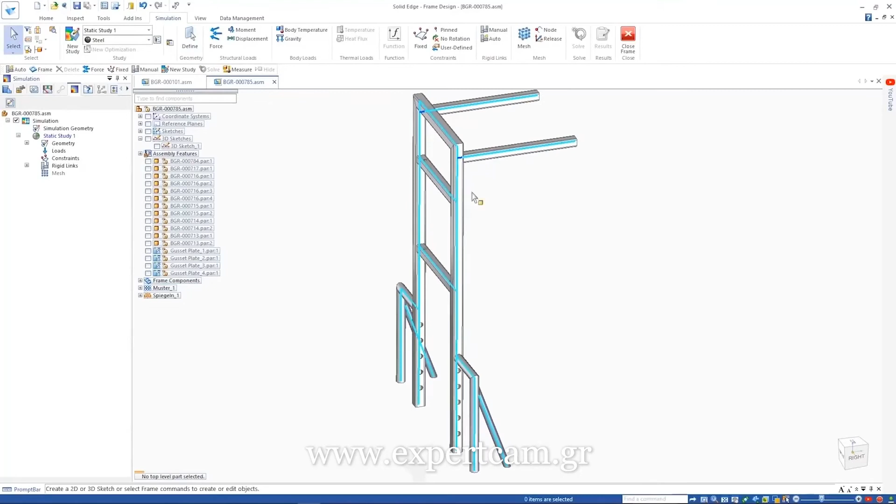Here the user has selected the bottom and changed some of the parameters to get the rigid connections correct. The bottom of the frame is then fixed, loads are applied, and the analysis is run.

Once complete, you'll see some enhancements to the output, to the post-processing for this model. We now can post-process and display contours using von Mises stress, and we've also improved factor of safety stress contours based on those same von Mises stresses.

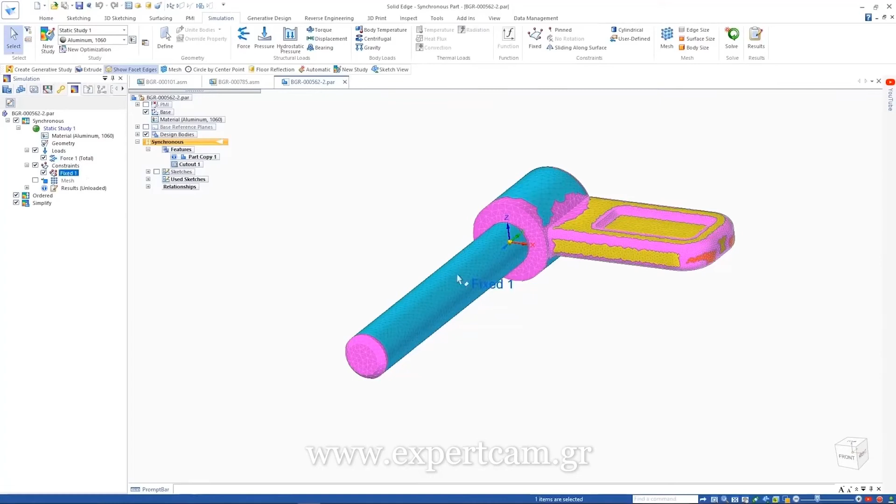Now back to the assembly, we're going to do another analysis on the pin within this assembly. You notice this pin is a mesh model. Simulation can now perform analysis on mesh models. You simply apply the boundary conditions, the loads and constraints where needed, and run the analysis. Here you see the result for the pin on this mesh model.

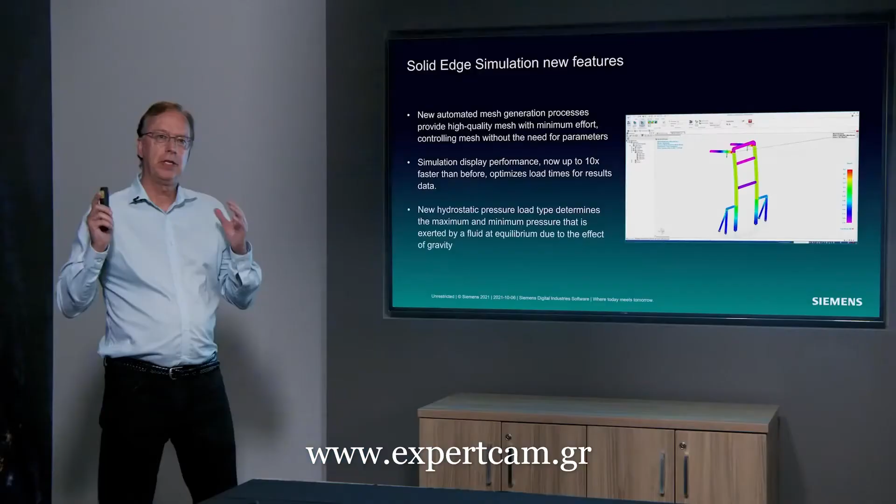Lots of great new things in there. Obviously, the hydrostatic pressure load takes a lot of work out of the process for you. The way the beam elements are automatically connected together, great stuff. But also that body mesher—you can take a mesh that's very irregular, very difficult, and remesh it with the body mesher. It's a game changer for analysis.

Next up is Simcenter Flomaster for Solid Edge. If you're doing any types of products where you have piping and you need to do analysis on the piping or design on the piping and the flow within the pipes, Simcenter Flomaster for Solid Edge is for you. Let's take a look at how it works with Jeff.

Thanks, Dan. The unique CAD to Flomaster technology extracts the geometry from Solid Edge assembly and automatically creates the corresponding fluid volume that exists inside the pipe runs and components. During the process, a face can be selected to give the length scale and convert the system to a subsystem.

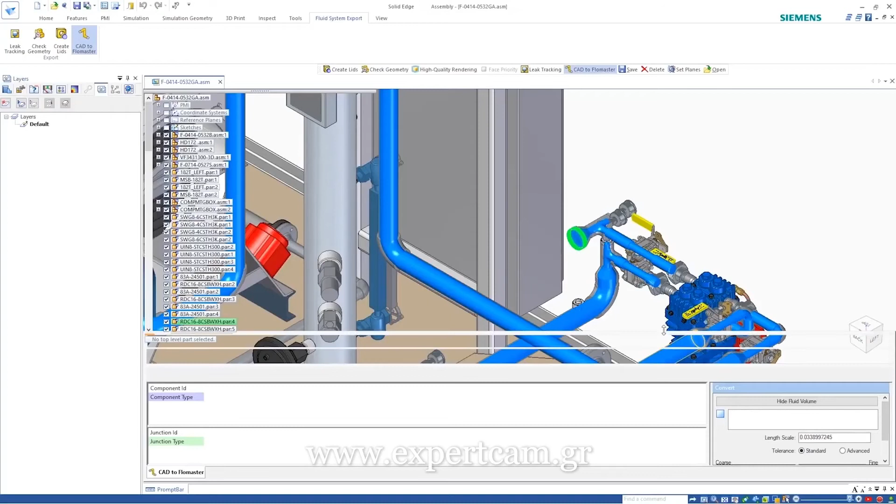The abstraction process is fully automated. There is also full control over the fidelity of the model, which can be adjusted with the slide bar. Individual elements can be inspected, deleted, and merged.

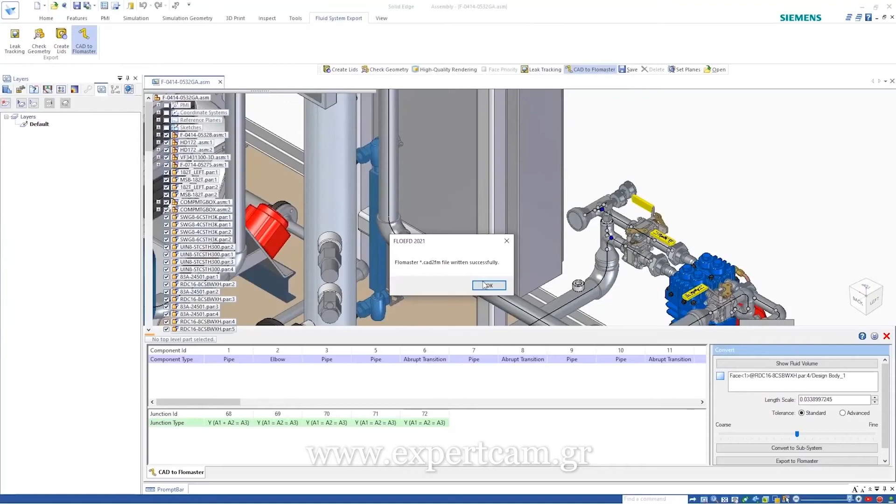Once the network configuration is defined, the geometry can be exported to Flomaster. Following export, the file will be saved for reuse, then automatically opened in Simcenter Flomaster for Solid Edge in the Subsystem Import Wizard. The CAD geometry, centerline, and component connections can be seen in the wizard, and the model can be rotated to the desired projection when the network is created.

On selecting import, a new subsystem will be created for review. The entire subsystem can be used to create a model, or individual pipelines can be extracted into their own subsystem.

For a flow analysis of this model, we are going to extract the pipe from the two compressors to the center vessel. We create a second subsystem from the first and save it in the subsystem catalog.

We'll now add the subsystem to a new network and specify the boundary conditions using pressure sources. We'll specify the compressor outlet pressure and vessel inlet pressures.

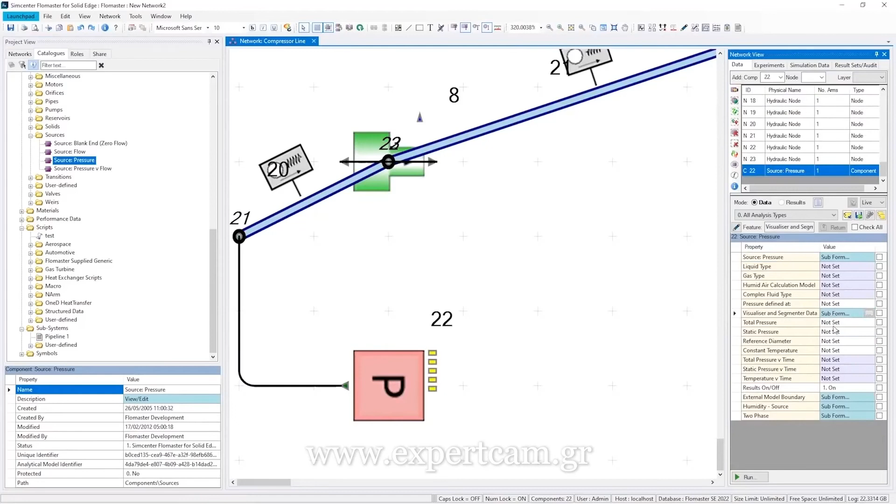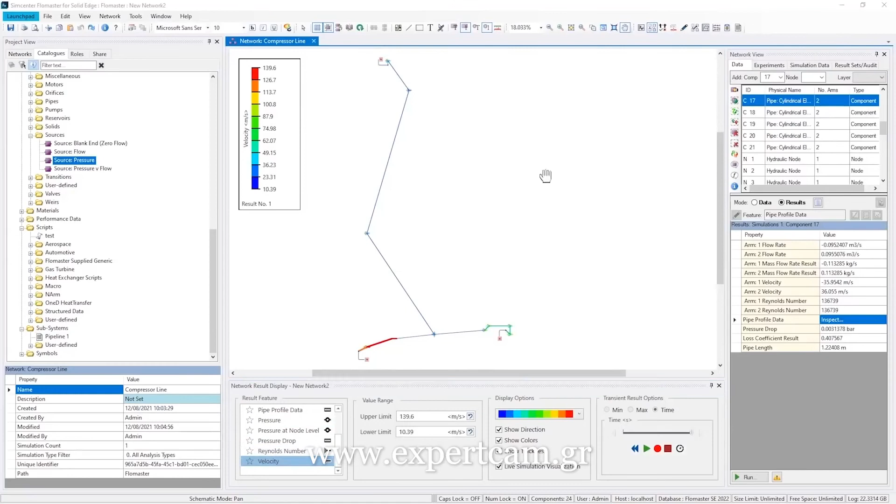For this low pressure system, we'll specify air as the working fluid and run a static simulation. Following the simulation, we can look at the results for individual components or look at the whole system using network visualization. With this, we can quickly oversee flows, pressures, and velocities.

Next, we'll look at the effect of a pressure pulse from the compressor on the system. We'll specify curves defining the pressure pulse and the source, and then run the transient simulation.

Following the simulation, we'll look at the flow into the tank, where we can see the effects of the pressure pulse from the compressor. Then, moving to the compressor outlet, we can enable transient visualization to see the variation in flows, and that the larger flow is from the left-hand compressor. And back to you, Dan.

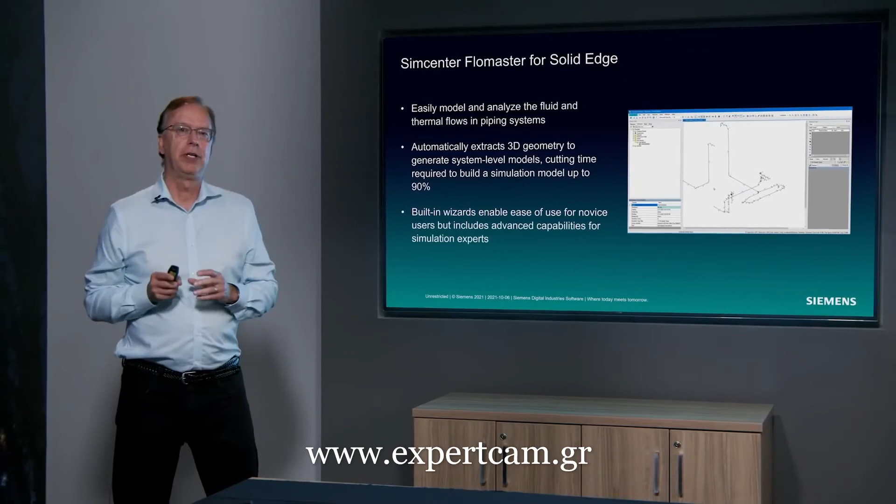Thanks, Jeff. Some super advanced technology there that we're happy to bring to the Solid Edge community. This is one of the advantages of the Accelerator portfolio, the ability to bring advanced technology to you. Great capabilities here in terms of easily modeling and analyzing the fluid system, with great extraction of center lines automatically from the 3D geometry, so you can go straight into that analysis and see what's going on with your system.

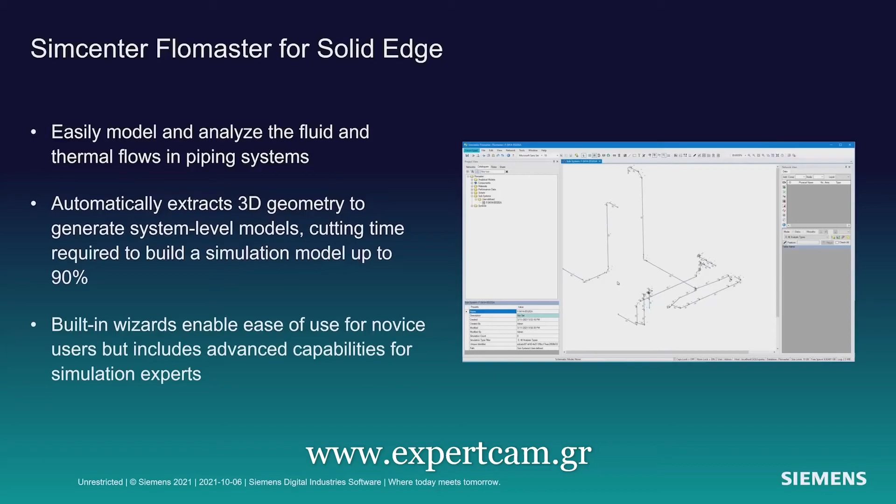So that was a feature-packed release, right? We went through a lot of stuff, many things in Solid Edge 2022 that are going to help your business. There's simply so many amazing things in there, the number of improvements are enormous, and I think that's been echoed by all of our beta customers. Everyone is saying this is the best release of Solid Edge ever. And so much more. We're able to show you a lot of great things in Solid Edge 2022, but there's so much more to see and learn about.